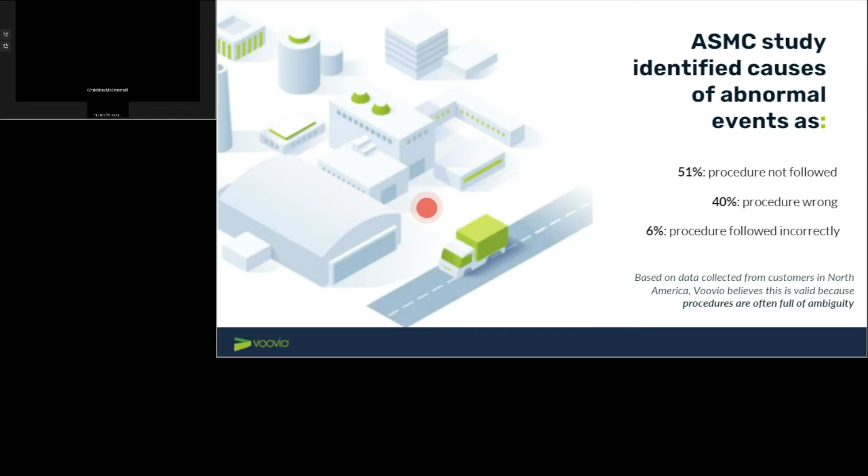Okay, thank you, Christian. So let's first talk about procedure clarity and what that means for an operator. As Christian mentioned in the introduction, we break it down into three steps: clear and concise actions. There are a lot of companies out there rewriting procedures and making sure they capture all the steps, but we believe that only accounts for one of the three aspects required to make a procedure clear and concise for the operator.

That's the words. The other piece is the ability for the operator to visualize that step in the field. Being able to visualize it brings the ability to understand how that procedure should occur. And then lastly is their ability to practice, or learn by doing, that procedure as they execute it in the field. We believe all three of those components bring procedure clarity to the individual operator.

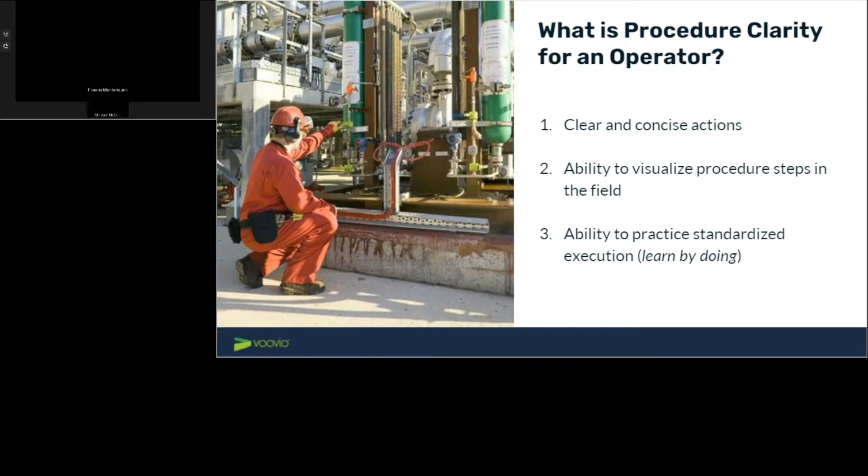As Christian mentioned, we did an analysis. We randomly sampled about 300 procedures from across North America and analyzed those procedures. On the screen on the left-hand side is a breakdown of that analysis. The majority of those procedures were startup and shutdown procedures, and 90% of the procedures we analyzed were SOPs that contained ambiguities or generalities. I'm going to talk more about that.

But to understand why procedure clarity is so important, we identified two reasons for suboptimal clarity. One is the procedure does not reflect the practice that is going on in the field. Across many units and many plants, operator practice does not match procedure, and in some cases it varies from shift to shift within the same unit.

That's one piece. The second piece, as I mentioned, is the ambiguities and generalizations. These procedures are written with the belief that the operator or the person executing it understands what it means to close all the bleed valves, etc. So to that point, I have a couple examples.

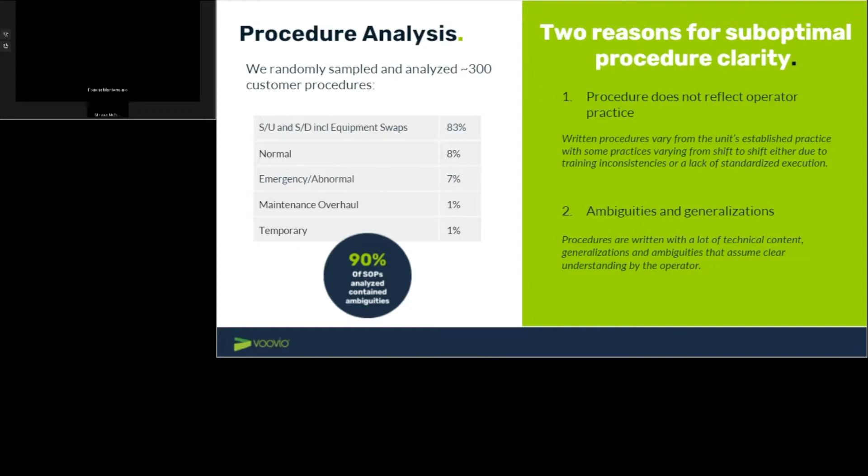This one case is somewhat extreme, but it drives home the point. The procedure line item stated, written at the top in step 1, that the intent was for the operator to use 70-pound nitrogen to purge all the equipment, process lines, etc. When our engineers, the Voovio engineers, walked that procedure with the resident subject matter expert and asked how to execute this one line item, we ended up documenting 112 actions that the operator needed to do to satisfactorily meet the intent of that one step.

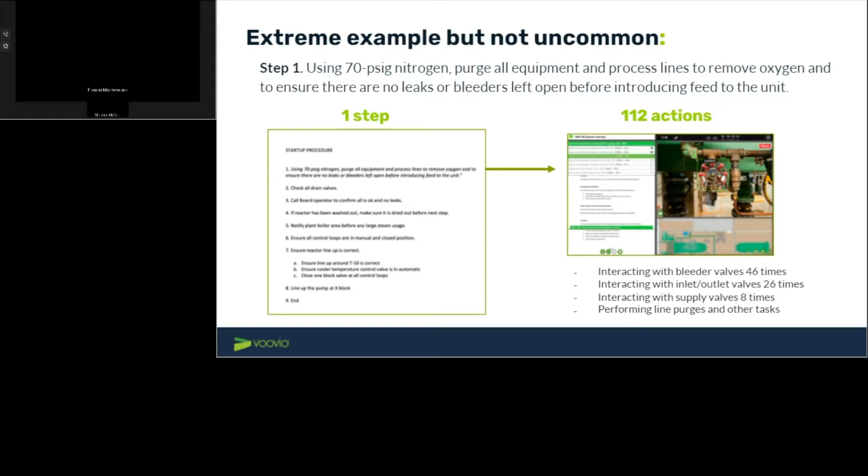Another example, probably more typical, is on a reactor in which the reactor needed to be flushed and all the components around it needed to ensure a good flush took place to prevent a reactor poisoning event. Again, when we walked that procedure with the resident subject matter expert, 53 actions were documented, involving the operator having to actuate 15 different valves. So again, ambiguity and generalizations are a significant component causing a lack of clarity in operations.

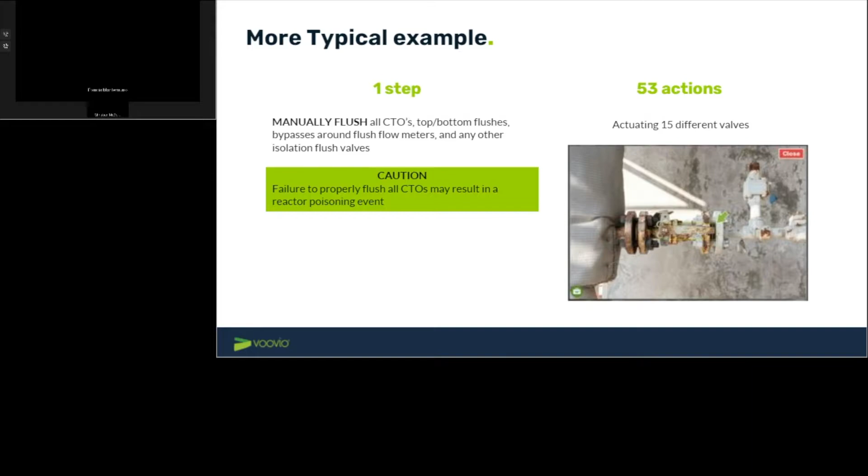So why is clarity important? Well, clarity leads to understanding, which leads to competency. And what this chart shows on the y-axis is operator competency over time. Traditional methods of onboarding, training, and qualifying operators involve reading procedures and on-the-job training or job shadowing.

With Voovio, the ability to take an action checklist, tie it to a visual or digital replica, and create a simulator for the operator to practice that procedure repeatedly, without having to depend on the availability of the SME, and then test that competency using a standardized test, we've seen 100% competency gains with operators and productivity improvements up to 50%. So with that, I'll turn it over to Christian, and he'll cover the Voovio demo.

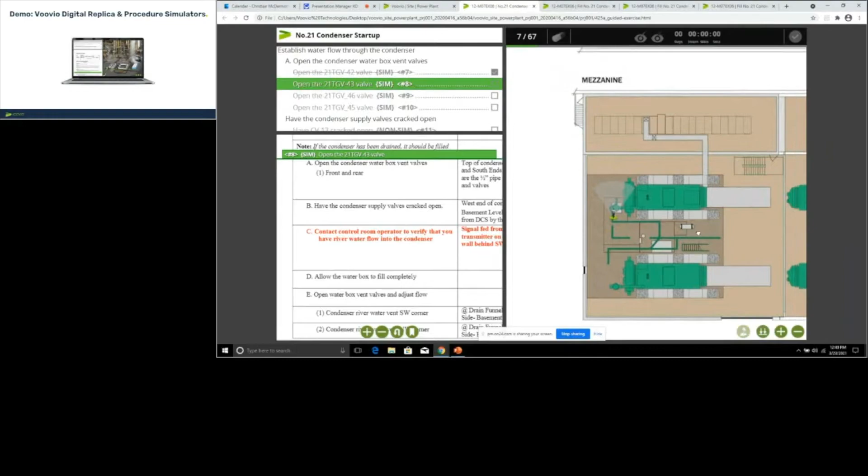So on the screen you have a simulator. On the right, where my mouse is waving around, that is the digital replica - the real view of the plant. This is where you can interact with the equipment and execute the actions that you see on the left-hand side. You also have a map at the bottom, so you can always see where the equipment is located and where you are standing.

On the left is your procedure document. This is the manufacturing plant's own document, its own words and all of that. So this is exactly what the operator would be using.

Above that we have this action checklist, and this is exactly what Fran alluded to. Because we're simulating every single action in each procedure step - for example here, open the condenser water box vent valves, it doesn't actually say how many there are. Some procedures, as you've seen, are a lot more vague. Here, for this step, we have 4 actions, and they're 4 different valves, and here you have the valve names as well.

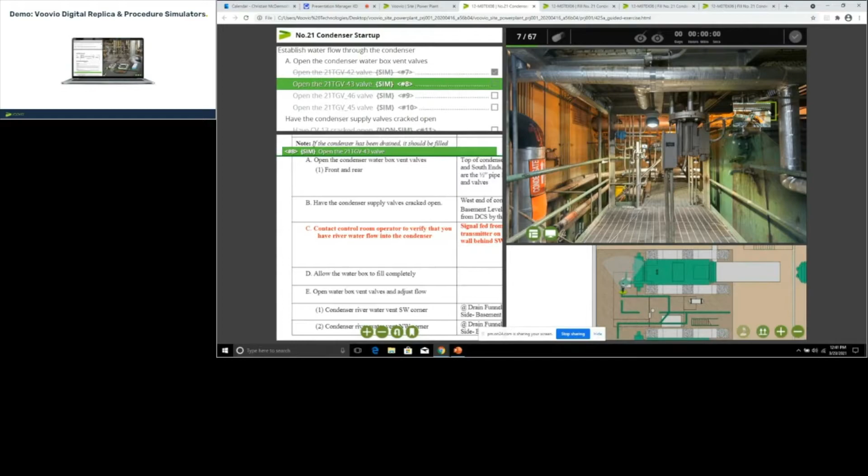And this is where we can now interact with the equipment here in the replica on the right. So I'm going to open the second valve here and confirm I've done it. You'll see that you have that clear and concise action-based step, and it's mapped to the real plant.

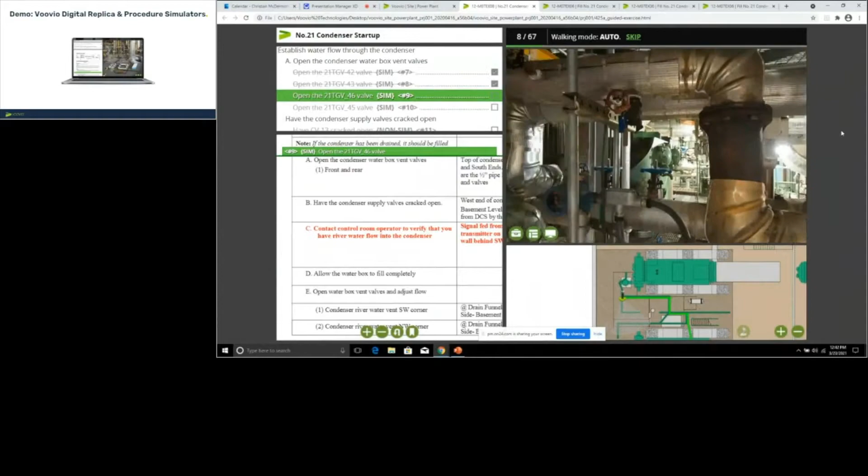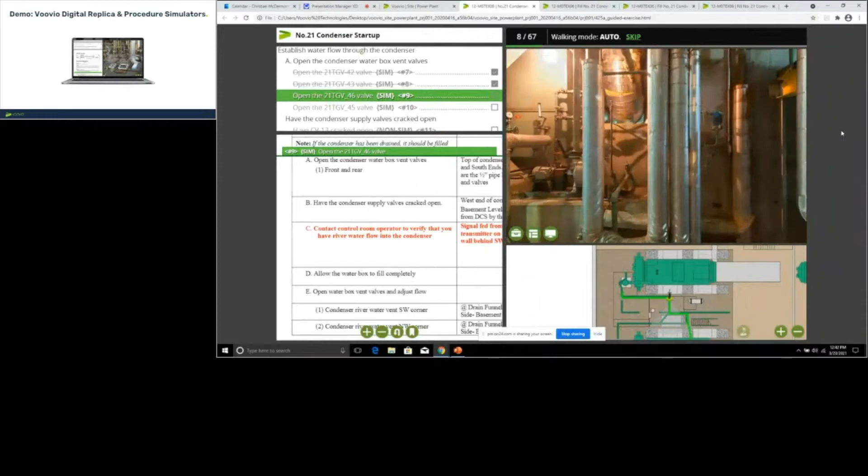This simulator that I'm showing you is called a guided simulator. That means it's like a virtual SME, a virtual subject matter expert, walking you through the procedure. Right now it's walking me to the next step, to the next valve, and it will instruct me when to interact and what to do.

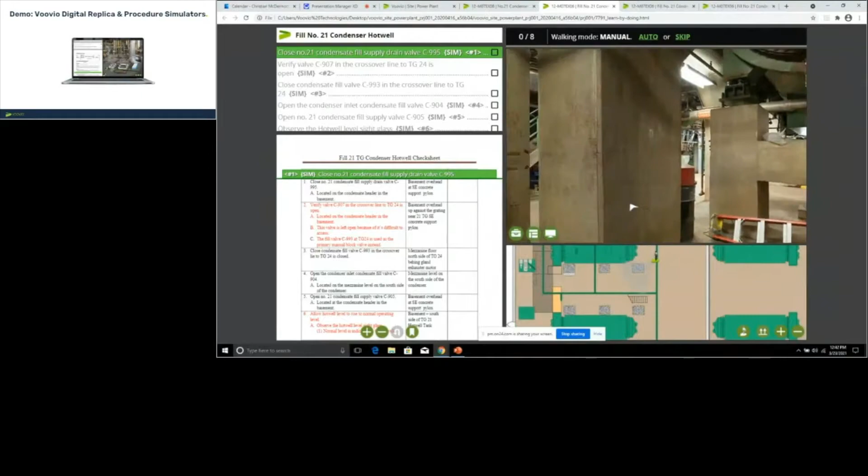We have a few different versions of this simulator, and I'm going to show you this one, which is not guided. So I can actually drive myself around, and you can now execute this procedure, and it will tell you if you're going wrong or not. But I'll do the first step here.

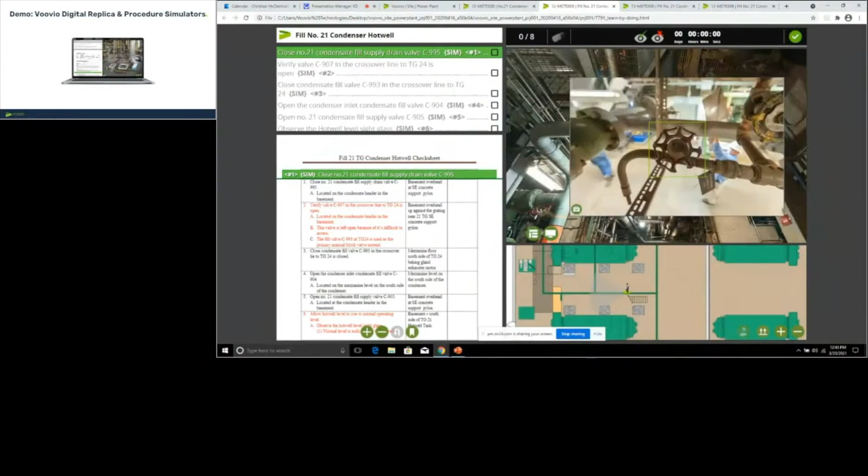And this is truly learning by doing. So I'm going to take this valve and close this valve as per the action checklist instruction. Confirm, and it will now move to the next step here in the procedure and the action checklist.

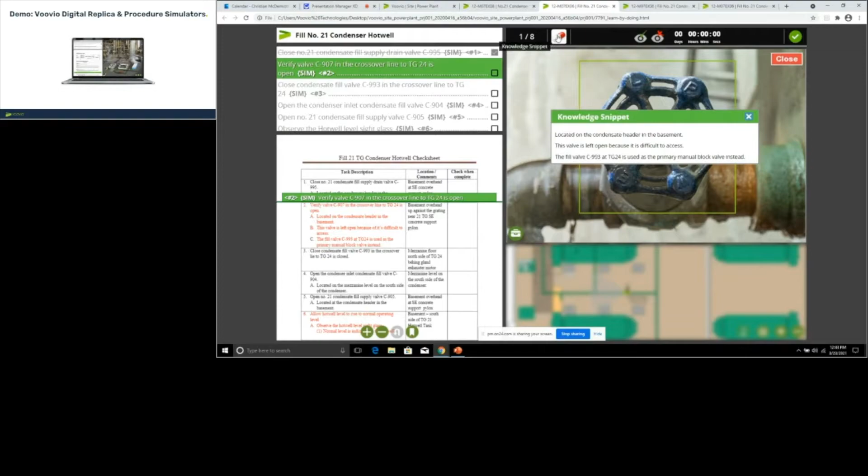The other thing about having a simulator and mapping your procedure actions to the real plant is you can also use it for knowledge capture and transfer - things that are not in the procedures. For example, here we have a knowledge snippet, which is basically telling me why this valve is always left open. It could be a video, or something else to explain how to do something or why you're doing something - cautions, notes, or anything like that. So a highly effective knowledge transfer tool to really get the right information to the operators.

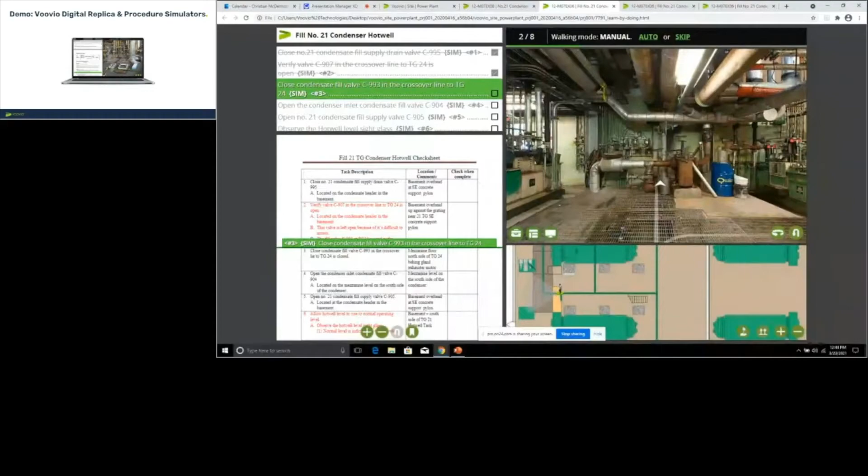So the learn by doing is really key. Hopefully we've explained how you can have clear and precise, concise actions, and learn by doing as well. But what about the ability to measure competency?

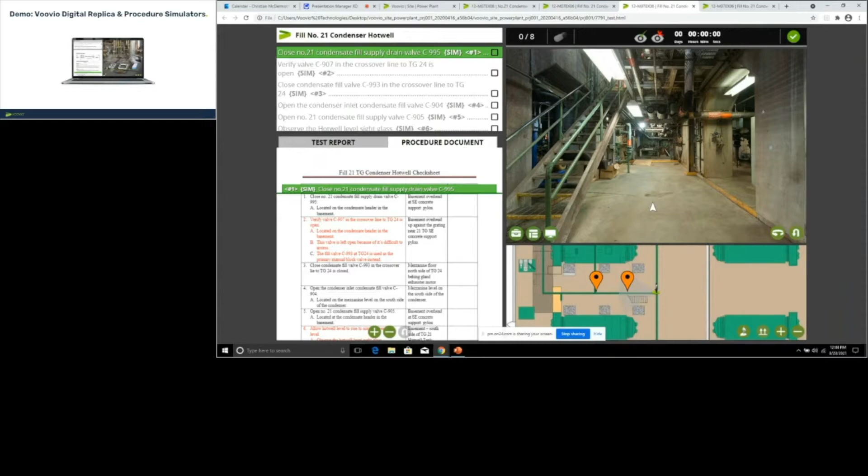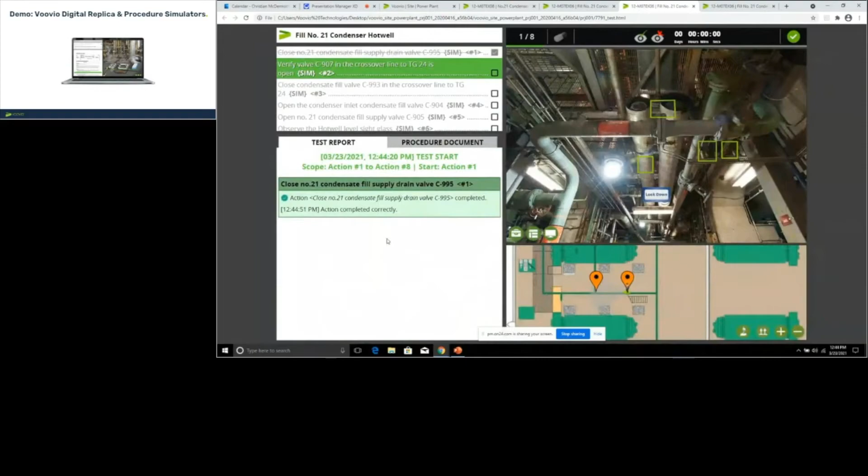So being a simulator environment, you also have the luxury of being able to test and get immediate feedback on everything you're doing. So in this simulator, it's the same layout, but here you'll see as I execute the first step - I'm going to walk down here and close that valve - you'll see that we get immediate feedback on the left in the form of this report, which says I got this action correct.

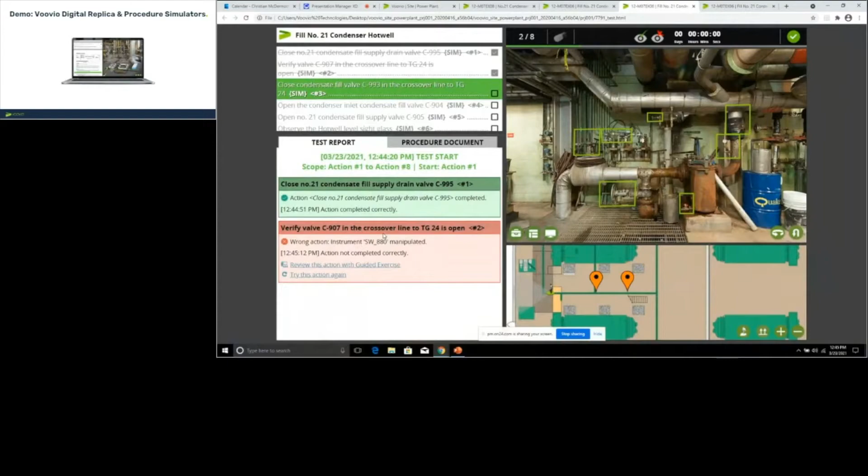So if I make a mistake, let me walk down here where we were earlier, and I'm going to crack open this valve and confirm. You'll see it says action not completed correctly. It even maps and tracks the valves or equipment that I've been interacting with. And being a simulator, you have the opportunity to try again. So that's what I'm going to do.

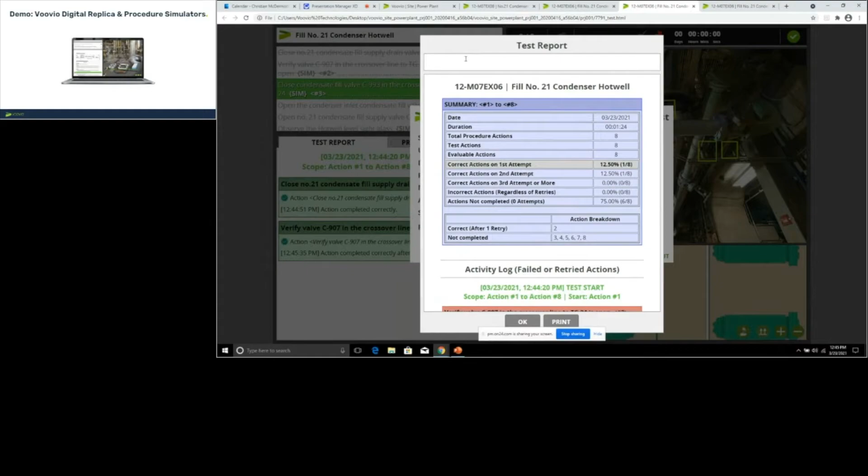When I do this step correctly, I get immediate feedback, and it's tracked that I got it right after 2 attempts. This is a way of not only learning procedures visually and by doing, but also measuring knowledge and competency. You get a report at the end of each test, linked to your operator name, with a detailed record of everything performed, giving a good snapshot of competency levels in critical procedures.

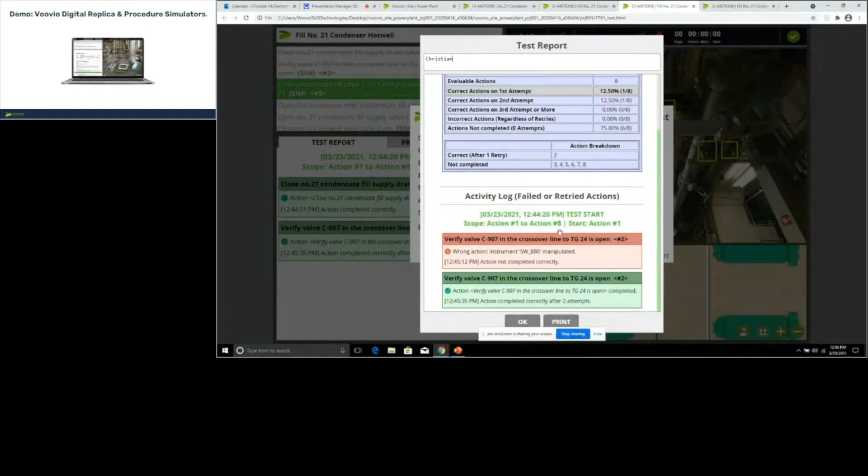Everything we've just shown is about building competency and ensuring procedure clarity. But what about using something in the field when you're actually performing a procedure?

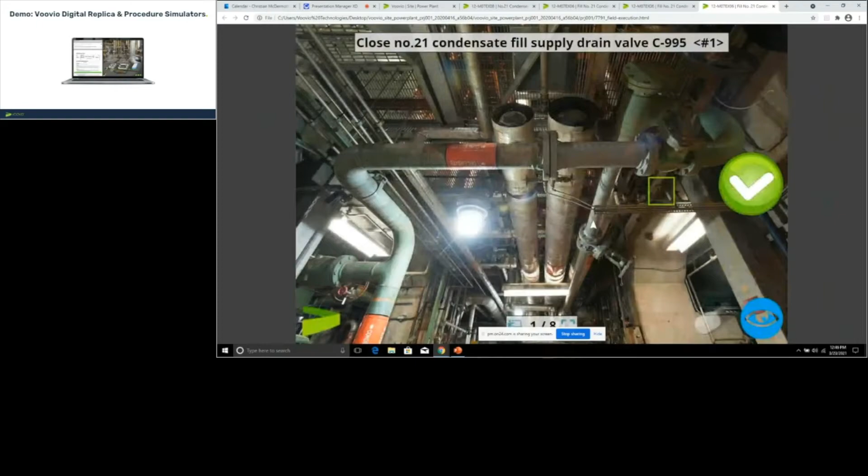This is an example of a field execution tool, utilized on a tablet or mobile device. You have your action at the top, combined with the image from that digital replica we showed before, so you can see where this piece of equipment or valve is located. If you need to toggle between the detailed view and the pathway view, it's just a click of a button, so very user-friendly.

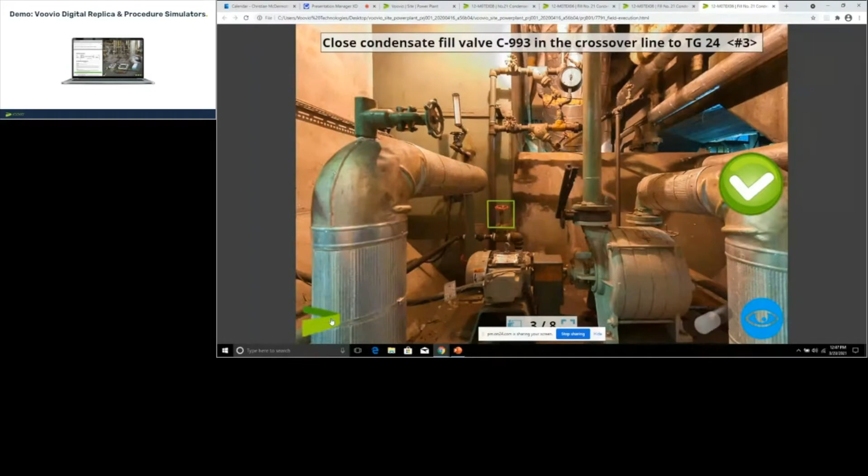The knowledge snippets we talked about are also available at the click of a button, so operators have all the information they need at their fingertips. There's also a note-taking capability, but importantly, it's a visual aid for operators in the field. The output, similar to the test report, is data stored in the cloud providing a snapshot of the procedure execution, including any notes.

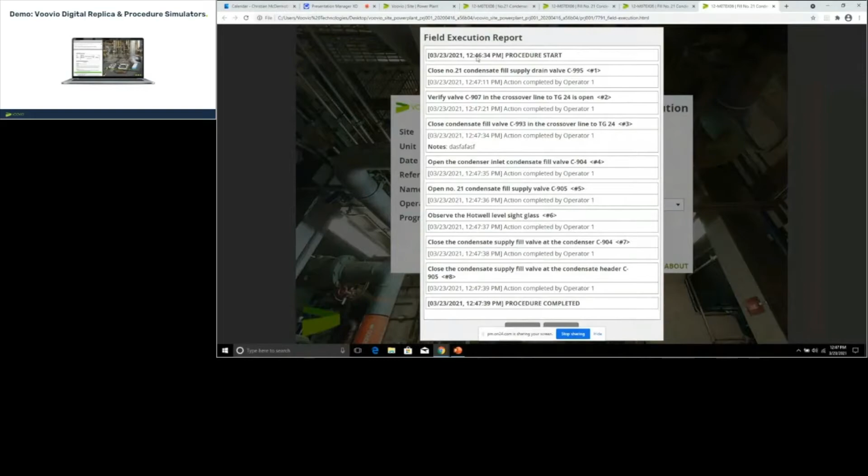So with that, I'm going to turn it back to Fran, who's going to continue the conversation.

Okay Christian, before you come back to me, can you go to the guided module? It'll help me with my next chart.

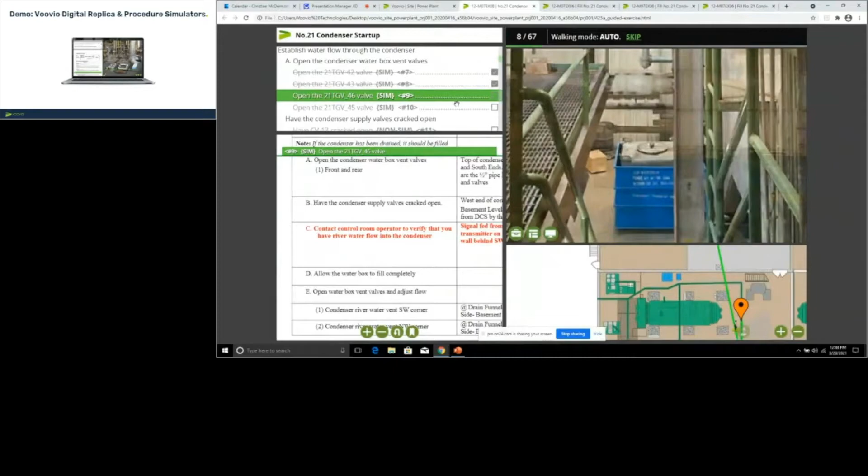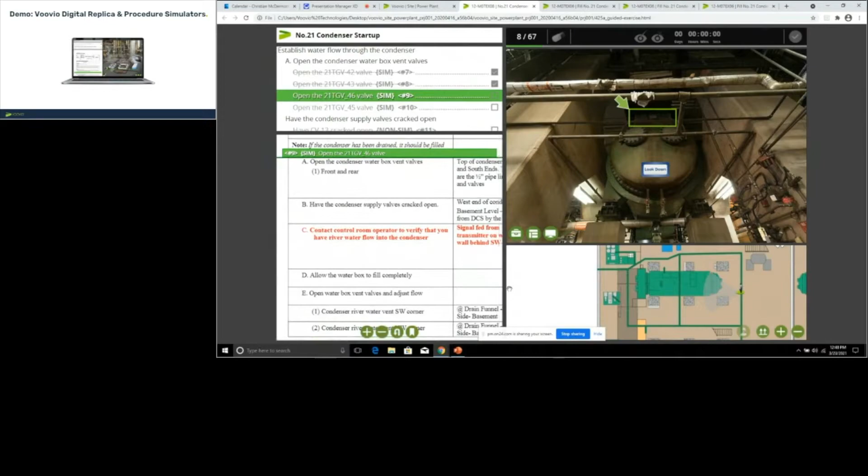What I'm going to show next is some data we've collected looking at the left side of the screen. The top left is the action checklist we create during our line walk. The bottom left is the customer's procedure document. So with that, let me go ahead and show my chart.

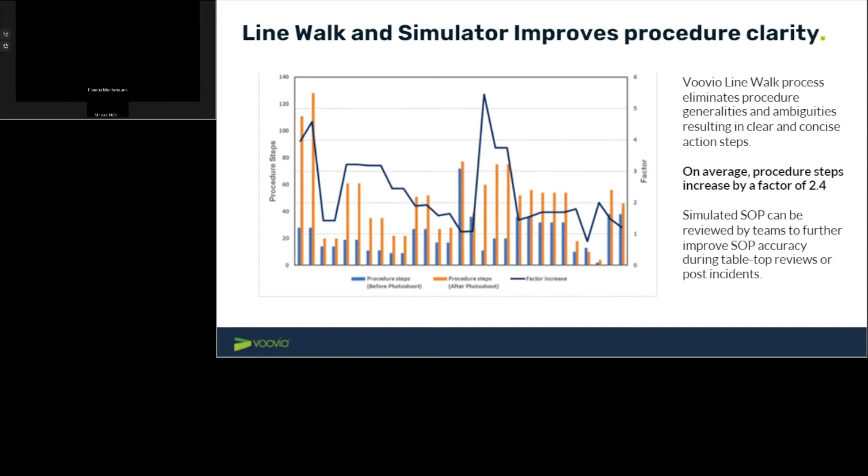As we talk more about clarity, when an operator is qualifying on a job, they read the SOPs. Traditionally, we find they job shadow for a couple months, do field walkthroughs, and then sign off that they've been trained or qualified. Usually the SME, the trainer, or the learning coordinator will sign them off as completing their qualification.

However, data gathered in industry by folks like McKinsey shows they only qualify on and actually experience about 40% of the procedures they qualify on. That's because the equipment isn't available - it's running, it's in operation, and the unit cannot afford to shut it down just to qualify operators. So they never truly experience the actual startup, shutdown, etc. procedure they're signing off on, meaning they have not truly demonstrated their competency or understanding of that procedure.

Again, that's the visual side - being able to visually see the procedure as well as demonstrate competency by working through a simulation provided using Voovio.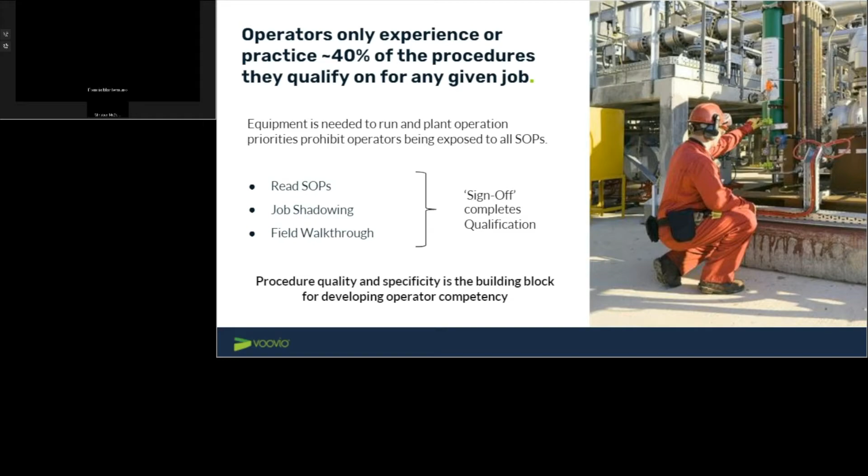We've received feedback after every project we implement, asking for operator feedback. In surveys conducted over the last 3 years, all operators have responded that they strongly agree procedure simulators make it easier for them to learn and understand their procedures versus traditional methods of just reading the written word.

The simulators provide clarity on how to perform their job in ways they haven't been able to understand or see in the past. And lastly, it increases their ability for procedure compliance. We believe this compliance has to do with the standardization provided by simulating these procedures. It eliminates one shift performing a procedure differently than the next, or one operator doing it differently from another, because when we conduct the line walk, we create the action checklist tied to the digital replica with visuals, and they all practice the same standardized procedure.

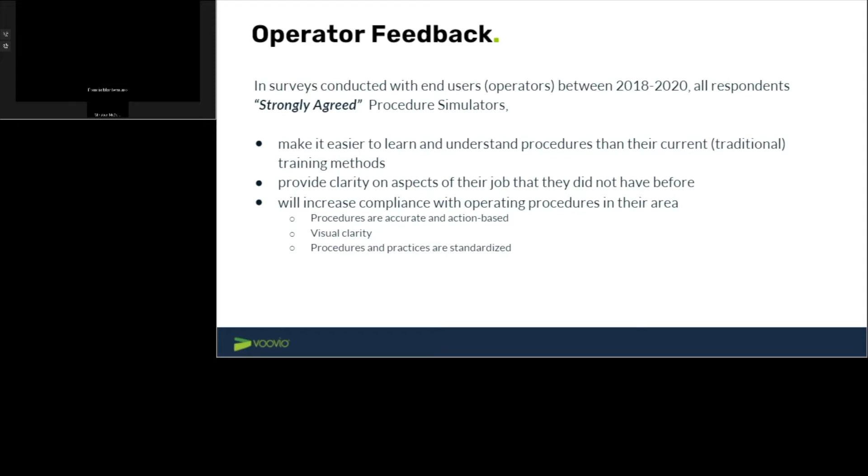So to wrap up, procedure clarity, I'll call it Voovio clarity. And the way we achieve clarity is five simple steps. It's the line walk with the subject matter expert.

We create the actionable checklist for every action the operator is expected to perform in the field. Generate the digital replica, which brings the visualization, the visual component of the field to the operator. And then once we can tie that checklist with the visual aspect of the field, they can then move to

practice and refresh the simulations. They can practice to a point of competency where they can take a test. They can also practice just prior to execution in the field, and we call that the refresh prior to execution. And then when they go to the field, they do have the ability to use the field execution tool on a tablet just to ensure that the procedure is executed as planned.

So with that, before I go into the case studies, why don't we open it up and see if there's any questions?

Great. Thanks, Fran. We do have a question here, so I'll get right to it. Is special infrastructure needed for this kind of solution?

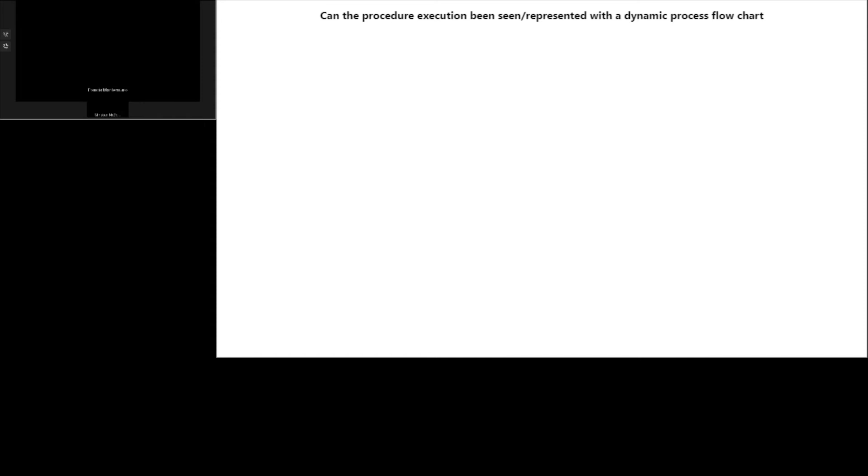Great, thank you Fran. Next question is, is this a classroom solution or could it be used with operators on the shop floor? Time to develop it is a matter of resources. Oh, Christian, I'll take it.

So it's every aspect of qualification for an operator. It's onboarding a new operator. It's a great classroom tool for process overviews. It's a great tool in the field. It's a tool that operators are using just prior to going out in the field and executing. And then it's a tool for recertification. So it covers all 5 phases of training for that operator, whether they're experienced or brand new.

As far as matter of resources to implement, Voovio is very resource light for the customer. We come on site, we need 3 to 5 days of the subject matter expert to do the photo shoot, do the line walk, and then we disappear. We go away for 12 to 14 weeks. Over that time, we will reach out to that SME for maybe 2 to 3 hours, 2 times. That's following the standard project process where we want to do check-ins to validate the data and the production we're doing is accurate. And then 12 to 14 weeks later, we deliver everything that you've seen.

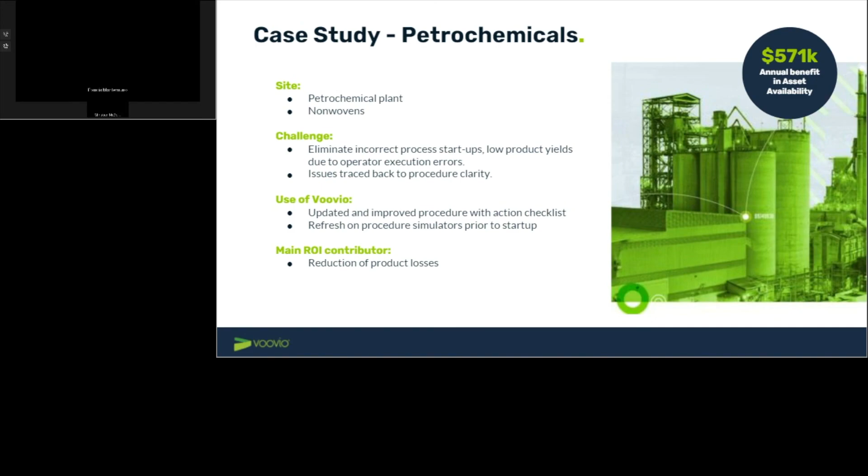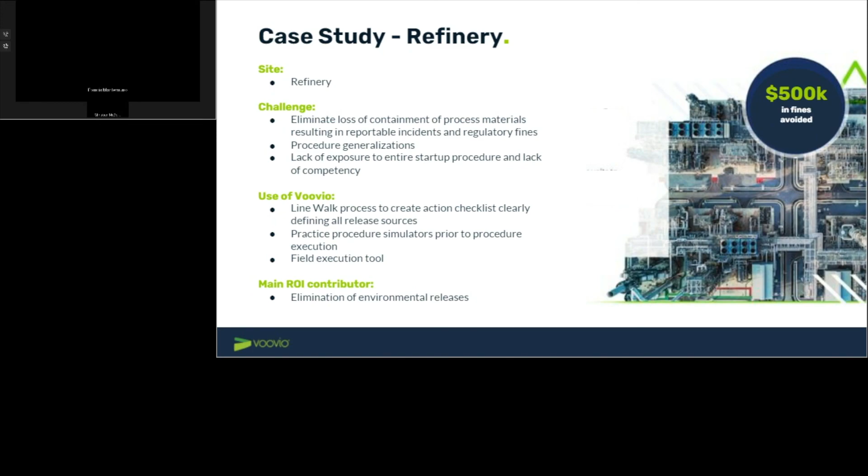And then the last one I wanted to cover, I see we're at our end of time, is we have a customer that was - I won't cover their turnover challenges - but it was more around having unplanned boiler feedwater pump shutdowns. This was causing issues with their uptime for the unit. In this unit, since they're supporting a major refinery, uptime is critical.

So we went in, created detailed checklists, allowed them to refresh prior to execution, and then they were able to go out and execute the boiler feedwater pump swaps without fail. That's all I have.